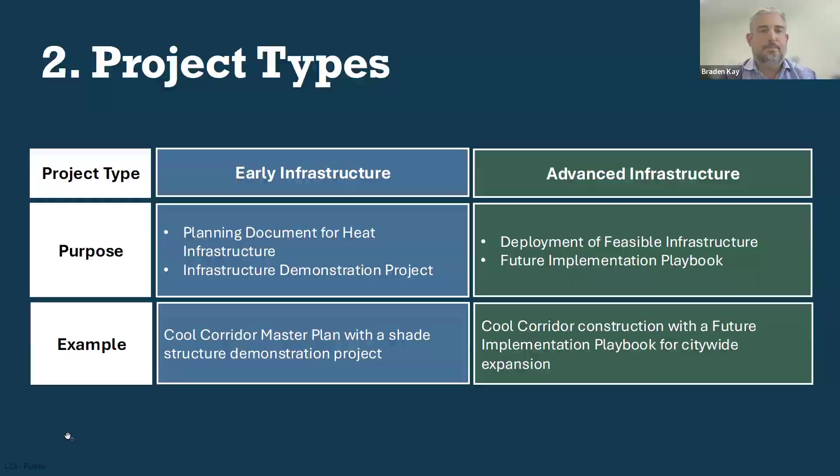In terms of what kinds of projects people will be doing: built environment solutions such as cool pavements, shading, passive and mechanical cooling, building upgrades, hydration stations, transit shelters - built environment changes that can reduce people's risk to extreme heat.

Also nature-based solutions, so urban forestry investments in green spaces, green stormwater infrastructure, and then also projects that combine both built environment solutions with nature-based solutions.

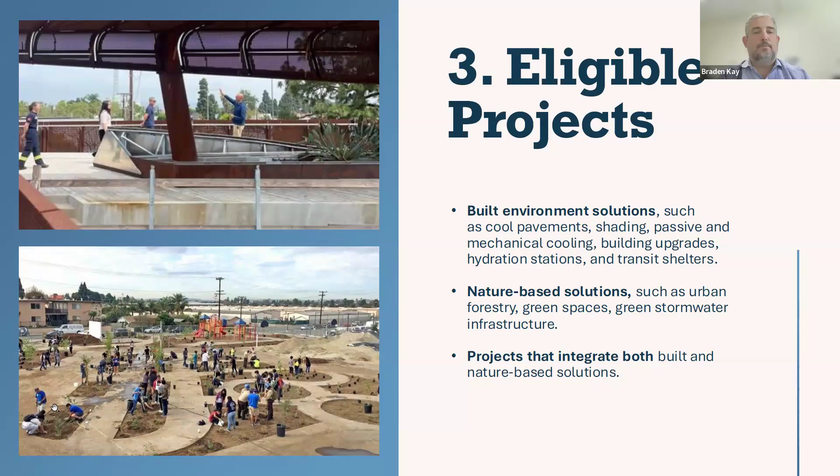So a little bit more about these two project types. The early infrastructure projects are 30-month projects, ranging from 750,000 to 1.2 million dollars. 25 to 60% of your budget needs to be on that demonstration project.

You can build these projects two different ways. It can be mostly a planning project with 25% for infrastructure, or it can be an infrastructure demonstration project that's 60% of the budget for infrastructure and less for planning. So you can use the project to fit your needs, whether you need more planning or more demonstration.

There are minimum requirements for how much you spend on your partner on the project, 8% minimum for the early projects. There's also a requirement for how much money you spend on your belonging initiative, so if you hire a social worker, artists, creatives, or culture bearers to help make sure infrastructure belongs to the place it's happening, we're requiring a certain amount of money gets spent on that work. On the advanced infrastructure side, these are 48-month projects, $3 million to $4.5 million, with 70% minimum going towards the infrastructure and the plans and processes required to build it.

For advanced infrastructure projects, there are minimum requirements of 6% for partnerships and 2% for belonging. And we allow for 15% indirect costs for both project types.

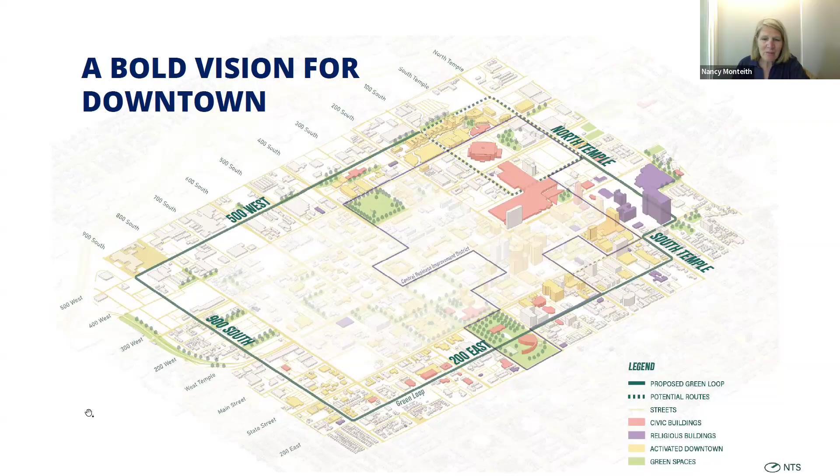So the Green Loop is founded on several principles: developing a robust downtown urban forest, serving as an active transportation corridor for walking and biking, improving water quality through stormwater management, and creating inviting social spaces that provide a variety of amenities and attractions, as well as creating public front yards and gardens within the downtown that support the needs of all users.

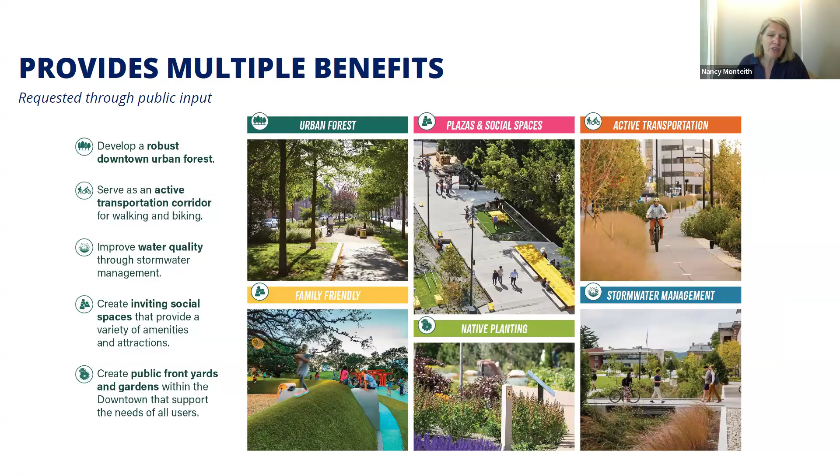So a little bit about the Green Loop history. Where did it come from? The idea of the Green Loop was first described in the 2007 Downtown Rising Plan by the Salt Lake Chamber. It's just one move among many to create this connected and thriving city. It emphasizes a green canopy embedded in a network of east-west connections to major green spaces across the city. It layers many modes of travel to support walking, biking, light rail, and commuter rail.

As you can see, the Green Loop in concept has been included by many plans subsequent to that Downtown Rising Plan in 2007, and most recently in the Downtown Master Plan, which was in 2016. One of the key issues to resolve was the lack of green space and tree canopy cover. And then Reimagine Nature, the Public Lands Master Plan, has it as a key element to increase green space downtown.

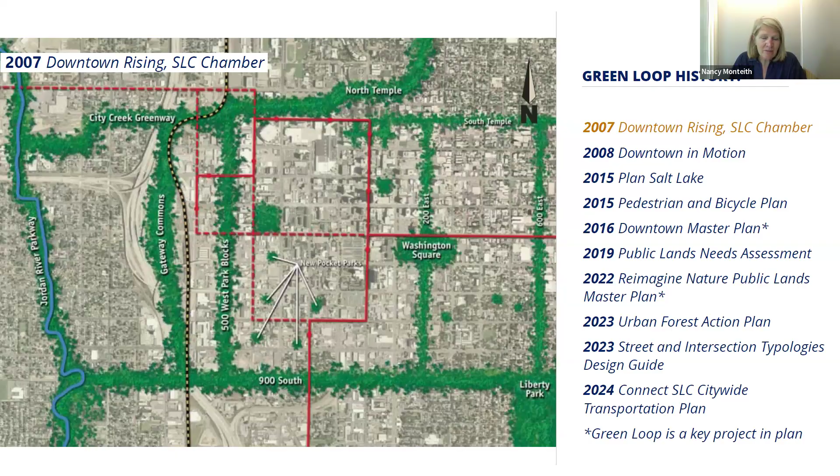This image is of downtown Salt Lake City, and it is color, even if it doesn't look that way. You can see here the dearth of green space and greening. There are a few spots. We have 3 10-acre parks that comprise Pioneer, Washington Square, and Library Square, but otherwise it's pretty hardscape downtown.

And then in 2019, Public Lands conducted a needs assessment in the Central City neighborhood area, which has the highest level of need for new park space in the city. With a built-out city, it's very difficult to compete with developers and other land uses to create new green space. So reimagining the right-of-way to be multifunctional in a linear park is one way the city can use its land that it owns to add more uses and more benefits in that right-of-way.

Currently, only 1.9% of the downtown planning area is park space in a neighborhood where residents typically live in multifamily buildings with no private green space. And the downtown only has 6% tree canopy, and only the airport has fewer trees than downtown.

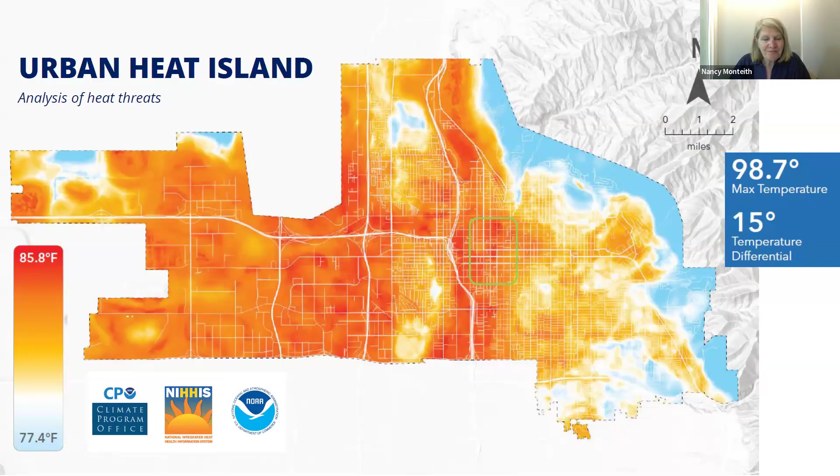It also takes that 1.9% of green space downtown all the way up to 5.7% green space, which doesn't sound like a lot, but it does make a big difference, even at 5%.

What we learned during engagement was that the biggest reason people visit a green space is because it's close to home and it has mature trees.

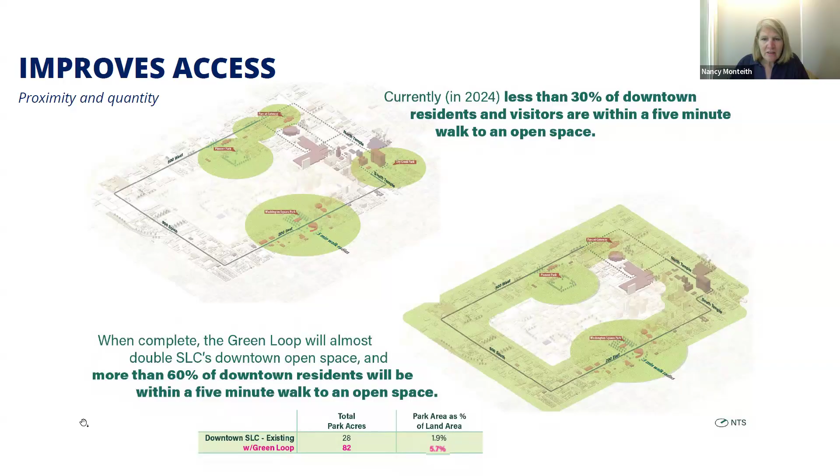The other thing the Green Loop does is add more connections, making the overall city more connected. One of the things the city is also working diligently on is east-west connections for bikes and pedestrians. Those are much tougher because we have the freeway going north-south and the river going north-south, so it's easy to move north-south but harder east-west. As you get the Green Loop in, it ties into many of these existing east-west connections and makes all areas of the city much more accessible.

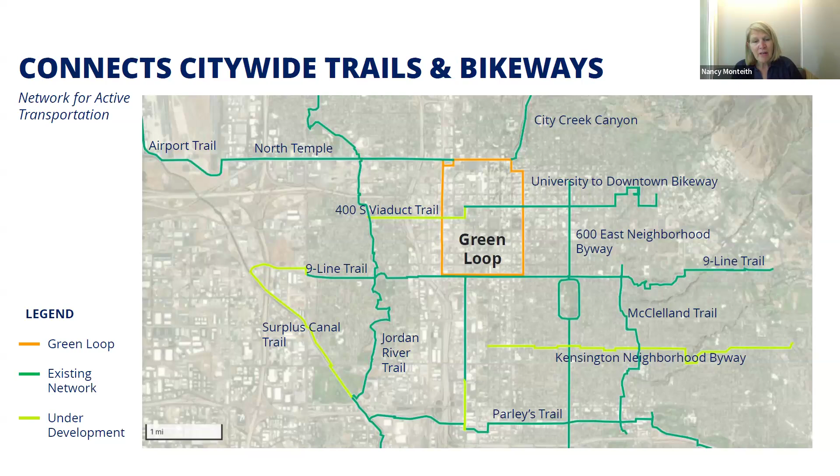We hired a team because we wanted to take this big, lofty idea and understand: can we really do what we want to do? We felt the first step was to take one leg of the loop. So we took the 200 East corridor, 9 blocks, and took that to about 30% design, a full schematic design, in order to test whether, given all the constraints, we could actually produce the results we want. The purpose was also to use the outcomes for planning future segments.

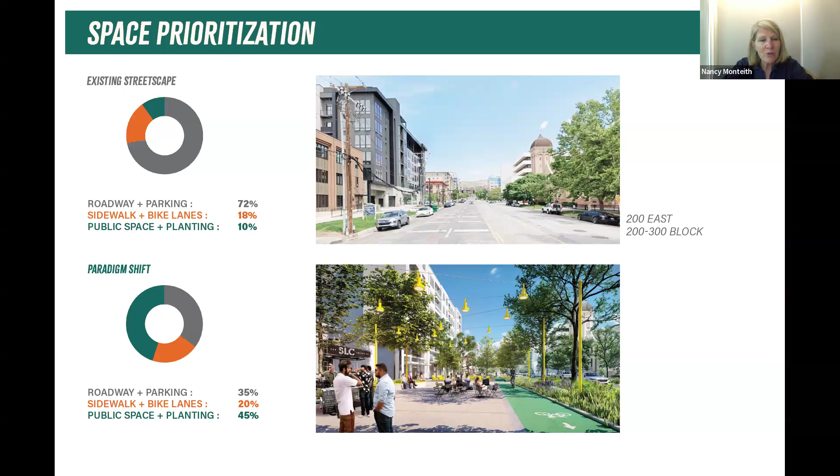The existing conditions of our corridors show that over 70% of our right-of-way, a 132-foot right-of-way, is dedicated to hardscape, roadway and parking, with only 18% for sidewalk and bike lanes, and about that much for green space. What the Green Loop allows us to do is flip that script and reduce the asphalt so we can bring in far more green space.

Another thing the Green Loop does is add a lot of economic opportunity. It will connect and link to multimodal trails throughout the downtown. We also looked at the economic successes of other cities who added greenways.

Currently, 34% of our downtown is vacant or underutilized land, 27% is surface parking, and 24% is tax exempt. That's high because we have a lot of church and institutional properties downtown.

A couple of examples we looked at: a greenway project in Lancaster, California generated $130 million in private investment and $273 million in economic output in the 2 years following completion.

This diagram shows how influential pedestrians and cyclists are - they spend an average of $70 more a month at local businesses than motorists. The Indianapolis Cultural Trail has seen $3.56 million in annual spending by trail users.

Tourism can create a sense of place and community. The Rose Kennedy Greenway in Boston saw more than 1.7 million visitors along that 17-acre greenway and hosts 400 free events downtown. Salt Lake City's 9 Line, which is the southern leg of the Green Loop,

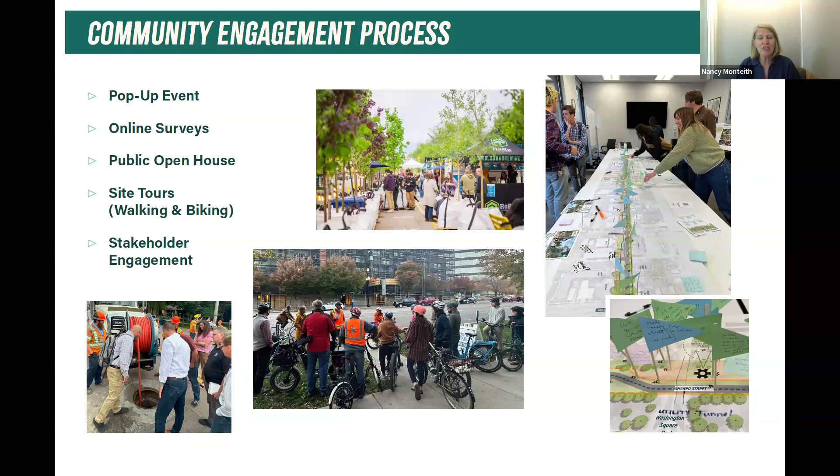Okay, next slide. The other groups we really had to work with were all the stewards of the right of way. This project gave us an opportunity to work closely with all the other entities that have some role in the right of way, including compliance, Downtown Alliance, economic development, emergency management which includes fire and police, our facilities, planning, our Arts Council, the Redevelopment Authority. We had 3 sessions really getting into the details of the plan.

Something we also learned through this process was that many departments have a role in the right of way, but they're all co-equals. So we realized we needed the sponsorship of the mayor's office in this project to help facilitate decision making and a path to move forward, because you could imagine many of these departments may have competing interests. So we needed a one city perspective.

Since that process, the mayor's office hired a senior advisor to help facilitate the discussions of the Green Loop and advance this project. It has made all the difference. So next slide.

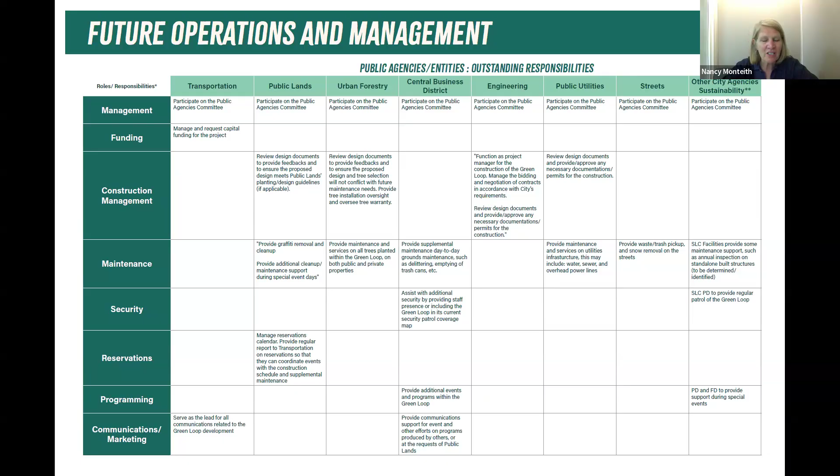Another thing that we looked at, and I know this one's hard to read, we studied all the tasks and all the things that have to happen in the right of way, which are on that y-axis, and all the departments that have a role in doing that on the x-axis, and filled the box to identify the overlap and the gaps. Also a really important aspect of a project of this scale.

Next slide. So with all of that, we could start thinking about developing the concept for the Green Loop. So next slide. This is a schematic of, again, 200 East. So it is 9 blocks, and for us, with our very large blocks at 660 feet per block, that represents about a mile and a half. They do change dramatically from South Temple all the way to 9th South.

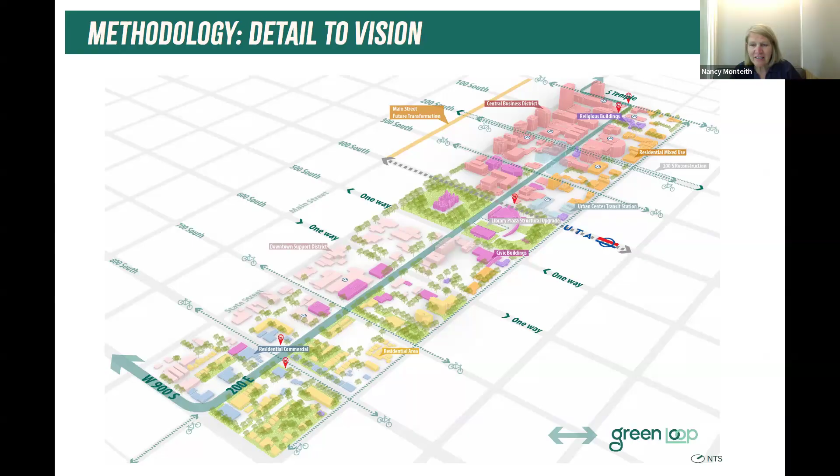So next slide. One of the things we looked at was within that 132-foot right of way, we wanted to understand, we have a lot of roadways that have a median in the center with roads on either side. So we wanted to study that typology and what it could return in terms of green space, amenities, and traffic flow. Or if we put the green space on one side of the street and combine the 2 lanes of traffic into one paving, what does that yield? The takeaway for us is that it was of greater benefit to have the green space located on one side of the street.

Either framework can be considered on other street corridors, depending on the constraints and access needs, if there's a lot of driveways or other things that drive that layout.

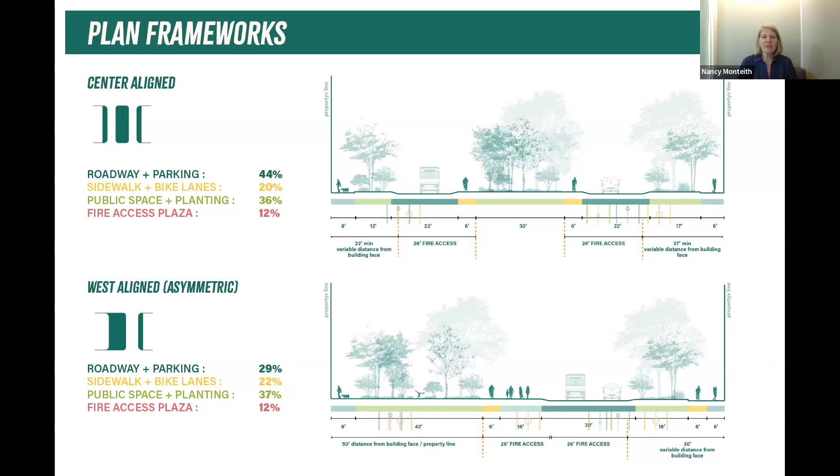Throughout the process, we constantly asked ourselves the question, is this worth it? And we set high expectations for success. We measured that, and we learned that we could bring up to 54 acres of new open space downtown along the green loop. We can add the urban forest, we have space for stormwater management, and we can include high quality bike facilities. Our goal was really to create 70% public space and green space.

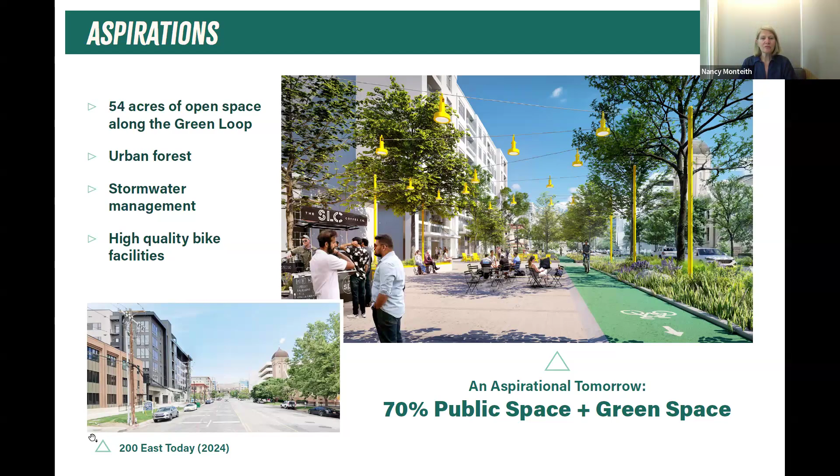This is an example of a section of it where the road is down to 2 lanes instead of more, with some select parking on either side and drop off areas. Then a separated bike lane, a stormwater quality area, and then amenitized public open space. This is what we're aspiring to.

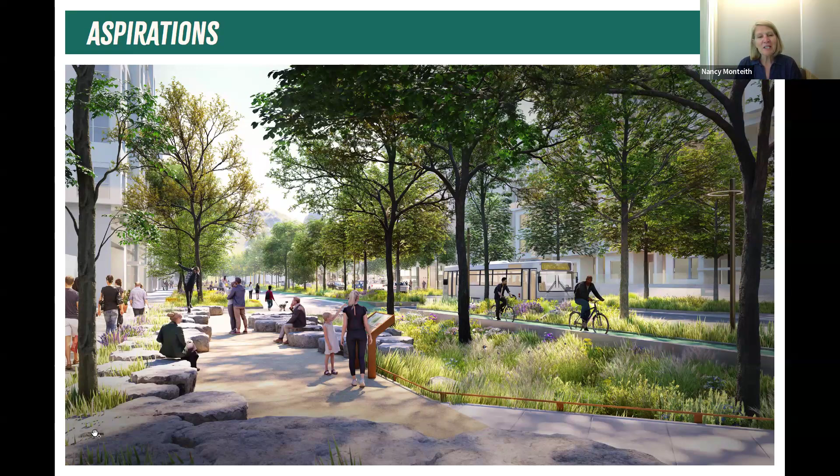Another one, probably my favorite diagram from the project, shows how important it was to reconcile not only above ground conditions but underground conditions. I think we initially thought our public utilities, we could easily move them around as part of the project, but they are very challenging. So we've come up with ways to accept the public utilities underground as existing conditions. We generally need to keep hardscape over the water, sewer, and stormwater. For the most part we've been able to show the roadway over major water and sewer, and then you see the bike lane on the other side.

Another thing that came out of this was there is a lot of private utilities, like fiber, gas, and so on. One of the things we talked about was installing, as part of our project, a private utility duct or bank — a vault that goes in the street, and all the private utilities would go within that rather than being spread throughout the corridor. That would make it easier for the city to manage those private utilities, and for the private utilities to manage their own access. So it's a 360-degree analysis to be able to add more green space and figure out where you can plant trees.

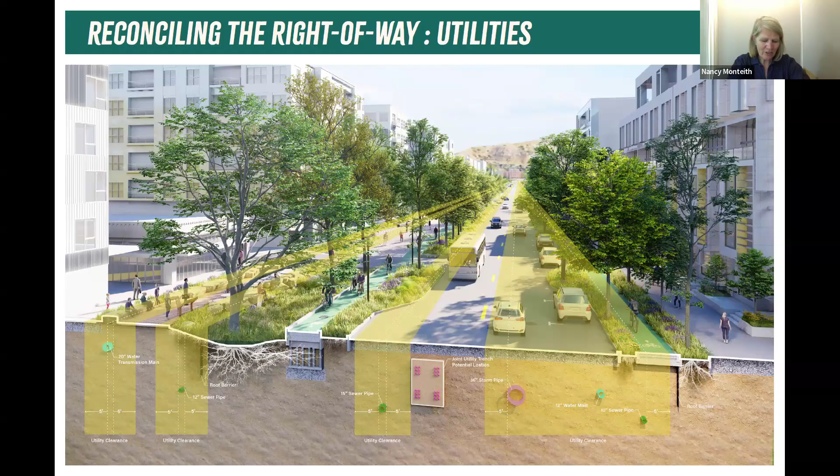Another thing we had to incorporate was fire access. With these very tall buildings, there's strict fire access requirements so that the fire truck can come in, do lay down, and reach up to the top of the building. So we've incorporated these fire plazas so they can get in, and they are in select places along the corridor.

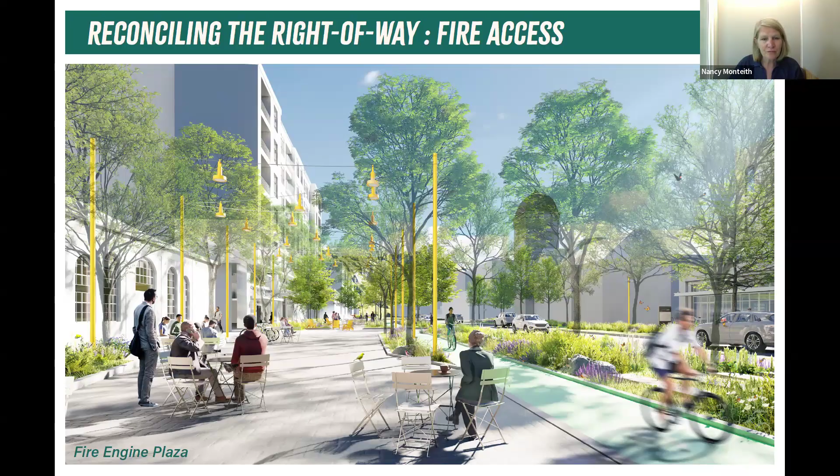We did an analysis and found that we could get to 66% of the green space looking at what we were able to achieve, and we think that's really good. Depending on different areas of the corridor, we could even increase it.

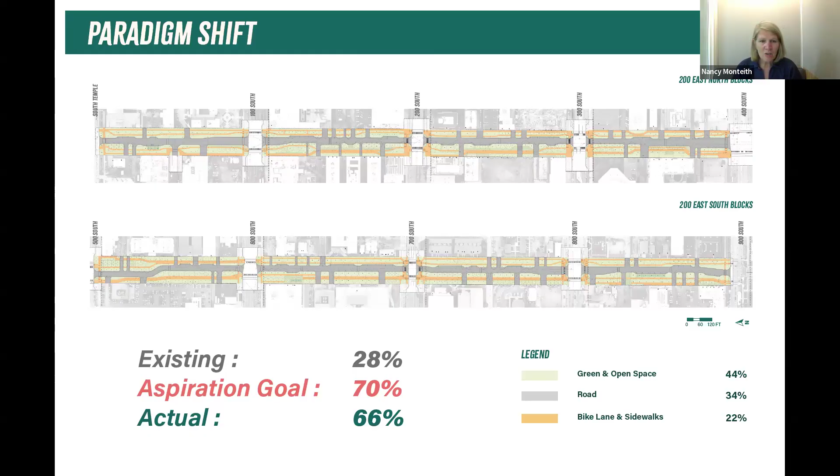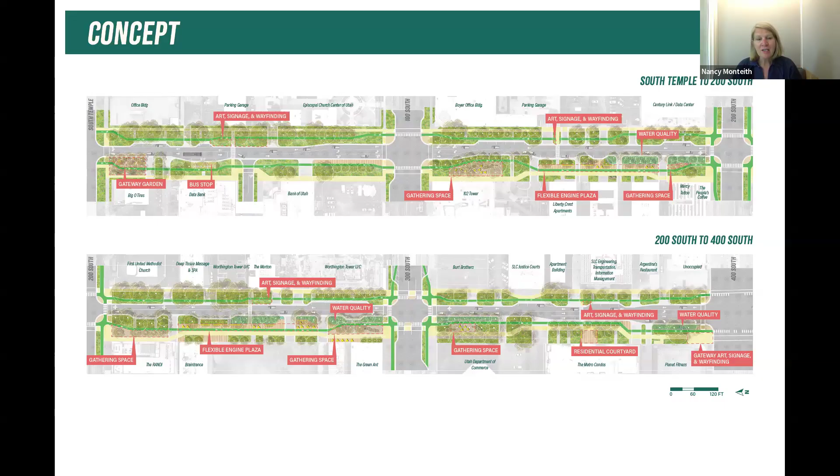This one is a little bit more rendered so it can show where specific programming elements can happen, like water quality areas, art, play, and gathering spaces.

This shows how the green loop could look once you have that space for green space. So what we're really saying is out of that 132 feet right of way, with 70%, you're looking at somewhere around 90 feet wide of green space that you can bring all kinds of amenities into, to add to downtown.

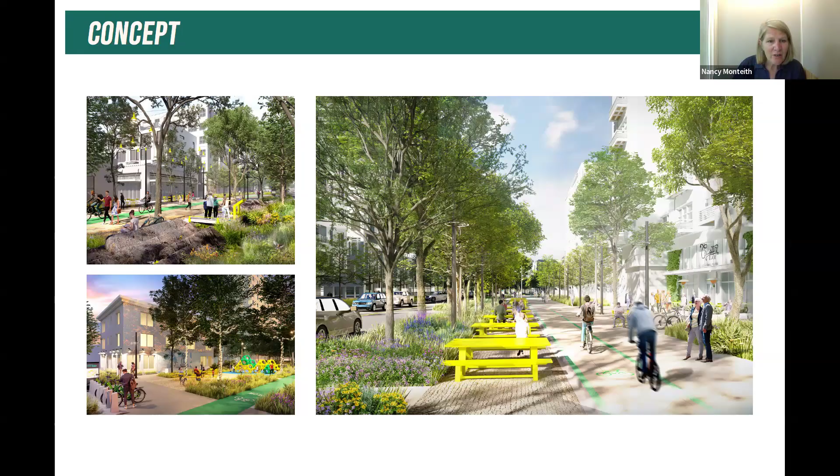The other thing we wanted to understand was a realistic view of the cost, and we felt we couldn't do that until we really got into a high level concept, drew it out, and costed it. Our estimate is that each block is going to be about $9 to $10 million, and we think that is equivalent to about 6 acres. So you're looking at somewhere around not quite $2 million an acre for park space development.

If we were to buy 54 acres of land for downtown, competing at current square foot costs, we estimated it would be around 350 million. So we're essentially cutting that cost in half by re-envisioning how we use our right-of-ways. The other thing is we broke down those costs into buckets that match funding streams — active transportation, green space, which we get impact fees for, and private utilities — so we can start to put together funding mechanisms for that.

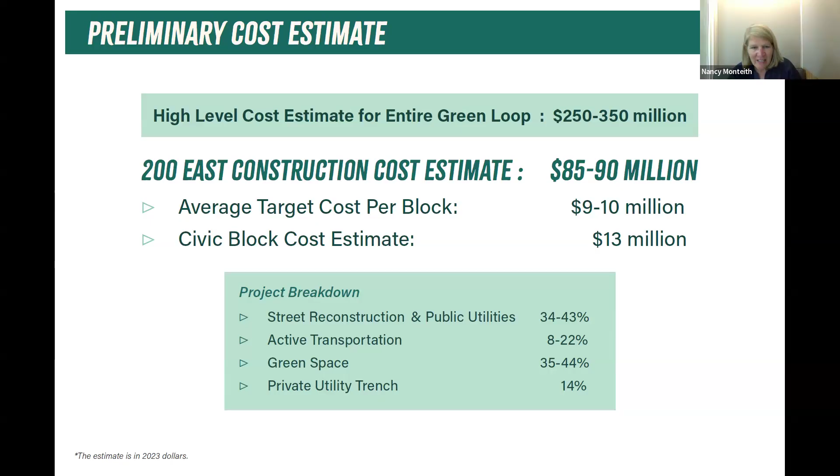So with that, I believe that is my last slide. We are currently working on detailed design for 500 West and targeting some section of that for early implementation. That is an area of town that has a significant amount of developer interest.

So we want to bring those two interests together to collaborate with those private interests on the look and feel of the Green Loop. So again, thank you so much for having me and allowing me to share this project with you. Thanks so much, Nancy.

And you can see there, a big picture vision, the realities of getting to it, having to deal with utilities, having to deal with fire access, all of those issues, but still figuring out how to move it forward and even thinking about capital stacking in terms of how you're going to actually fund the thing. Now, over to you, Brian.

Thank you so much. Yeah. Awesome. My name is Brian Tonetti. I am the Executive Director of Seven Canyons Trust. Next slide, please.

So for those who are not familiar with our organization, Seven Canyons Trust is a 501c3 nonprofit organization based in Salt Lake City. Our mission is simple, profound, yet really complicated at the same time. It's all about uncovering and restoring the buried and impaired creeks in the Salt Lake Valley.

We have very humble beginnings. Actually, we started in a University of Utah urban ecology class back in 2014, where they were learning about the status of these creeks, these buried and impaired waterways. And in 2014, as a result of that class, they were assigned to complete a document called 100 Years of Daylighting, and you can see the image of the cover page of that, where they were basically tasked with envisioning 100 years of restoring.

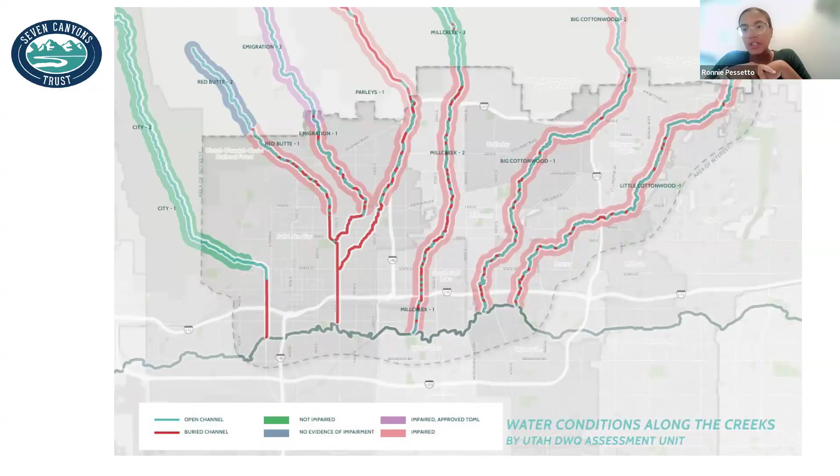Next slide, please. So after establishing Seven Canyons Trust in 2014, the first thing we did was identify where our initial demonstration project would take place. We wanted to focus on restoring the buried waterway and creating a project that would demonstrate the environmental, social, and community benefits of creek daylighting.

And we chose this parking lot. And it's not just a parking lot, it's a space where Red Butte, Emigration, and Parley's Creek actually run underneath in a pipe or culvert before joining into the Jordan River. And it's located in the Glendale neighborhood on the west side. Now, although you will see what it looks like when we first started, you all at the end of the presentation get to see what it looks like at the end. And it's a very, very stark difference.

So beyond the fact of where the location of the creek is, we also took a look at the challenges within the west side. The west side of Salt Lake is where our vulnerable population resides, and so there was a historic reputation of the creeks buried in pipes. There was industrial land uses and asphalt dominance, and I would argue it's still kind of going on. Lack of tree canopy and shade, heat island impacts on frontline communities, and limited access to quality nature and waterways. So maybe you all have some sort of alignment in those characteristics in your communities of needing nature-based solutions, urban heat island reduction, community resilience, and really equitable public space investment.

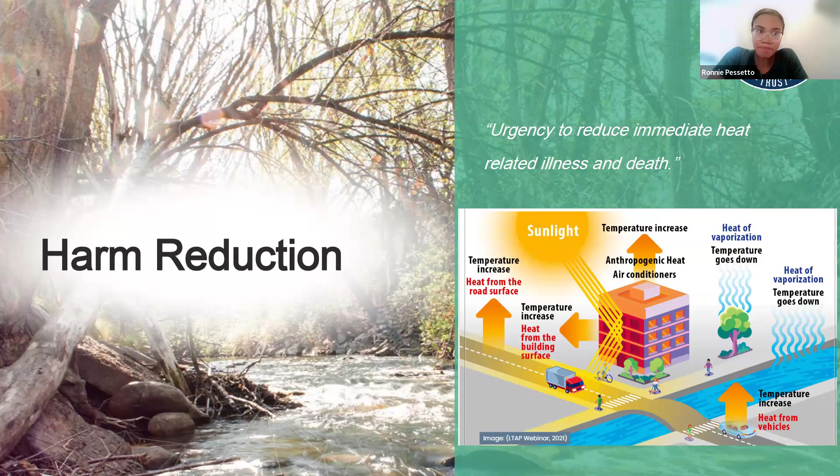The second value is partnership - recognizing that effective solutions require both community knowledge and institutional capacity. Without saying, collaboration has made this project possible. Yes, there was an initial spark within Seven Canyons Trust, but it was really owned, loved, and nurtured by the entire community. These projects become stronger when multiple sectors share ownership, when community voices shape implementation, and when environmental goals connect to the arts, health, education, and so on.

Then you have the value of belonging, which is all about ensuring that infrastructure is designed with and for the people who utilize it. Like I said earlier, community was definitely not an afterthought for this project - for any really great project, I don't think it ever really is.

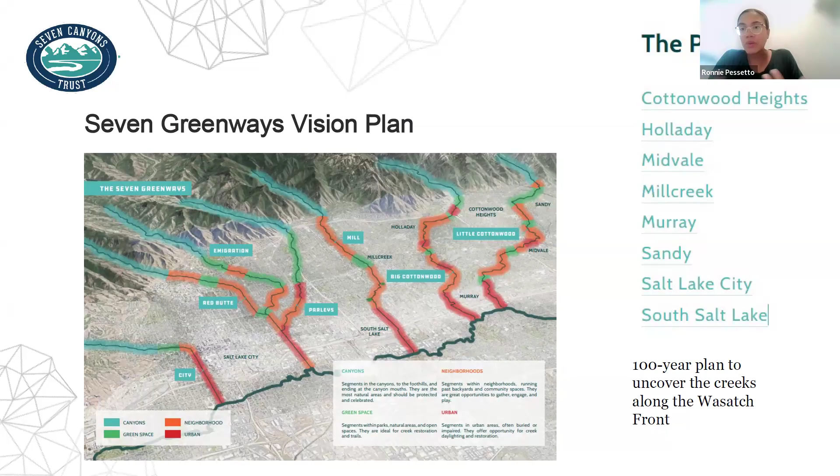This document acknowledges the creek history, uses shared metrics across jurisdictions, and helps prioritize where restoration will reduce riparian stress, and moves from this state of observation and paralysis of like, how in the world are we going to take this thing on, to, we actually have an action plan to refer back to once we complete a project and really feel a sense of accomplishment.

So there are opportunity sites that were made in collaboration with partnering cities, and they're really divided up into four core elements: water, community, urban nature, and recreation. As you can imagine from these elements, our future work will look different for each opportunity area.

So it may include one or a combination of the following: daylighting projects from a pipe or culvert, expanded green corridors, cultural activation along waterways, community resilience hubs, heat mitigation through riparian restoration, and so on and so forth. Ultimately, this work is about understanding these opportunities that exist within the valley and really building trust, meeting the community where they are, meeting these creeks where they are.

And so the Three Creeks Confluence just ultimately really became a bridge to something so much greater than a single project. It expanded the conversation about the role our waterways play in our urban environment and helped people to see the ecological, the social, and cultural value that these healthy creeks bring to our community.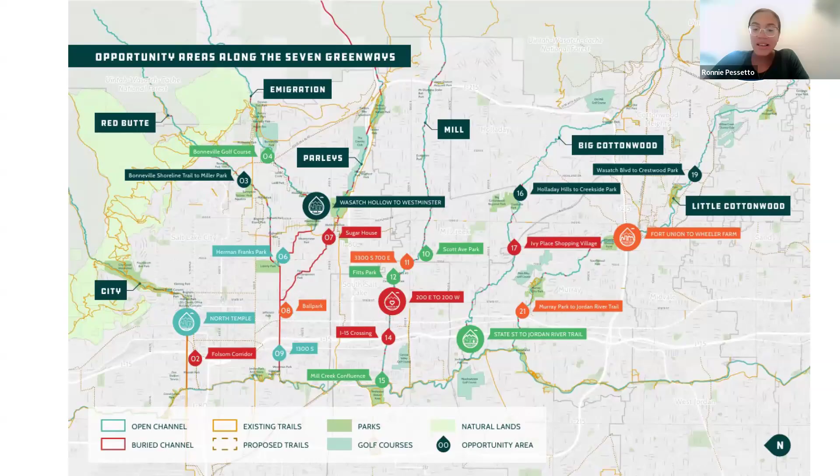And so with that being said, our next step is the Folsom Trail. And we're working to uncover City Creek. So I am pretty much finished. Thank you so much for sharing space and hearing our story, and I look forward to hearing some of your questions.